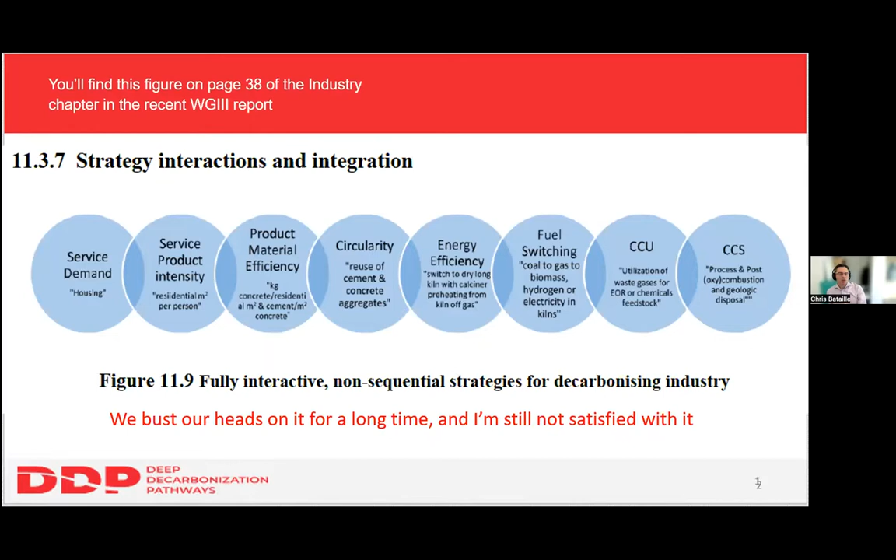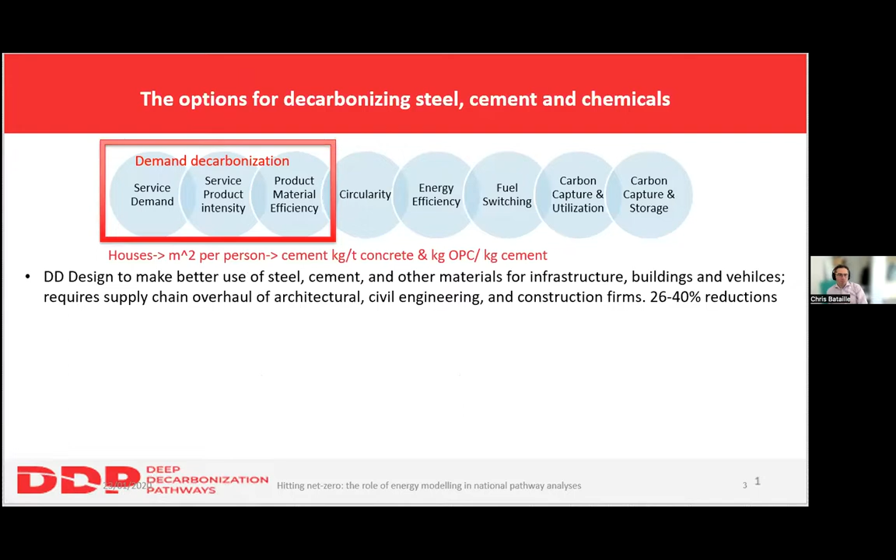Now, if we can go to the next slide, please. I'm just going to ask you to click forward about 6 times, please. Sorry, I was anticipating just until we get the big red box at the bottom. Okay, stop there, please.

Marching through, for all the industrial sectors, we march through these big interacting strategies. We looked at design to make better use of steel, cement, other materials for infrastructure, building and vehicles. However, that requires a supply chain overhaul of architectural, civil engineering, construction firms. Looks like about 26 to 40% reductions can come out of that.

In terms of circularity, we can recycle concrete by grinding up, recovering unreacted cement and aggregates. The big area for recycling is going to be steel, where we can get the maximum amount of iron product back out of the economy, but it needs less contamination - we have to do it at a higher quality level. And maybe in 100, 150 years, we won't need new primary iron. There'll be enough steel circulating in the economy that it'll only need small top-ups.

Where energy efficiency really kicks in this system is in the production decarbonization, and I would argue in a different way than we've been thinking about it up until this assessment.

For steel, up until 5 years ago, we thought it was all going to be about efficiency and CCS. But it turns out there are new primary processes that have been largely developed but just not used because they're more expensive: completely eliminating emissions in steel using direct electrification and hydrogen made either through electricity or from methane and CCS. Those processes are just coming off, they're at the near-commercial stage. They need decades of evolution to reach their nth level of energy efficiency. We're leaving the zone where we've been perfecting the blast furnace and basic oxygen furnace for almost 100 years, and making a jump to a whole new set of processes that need a whole new evolution of energy efficiency.

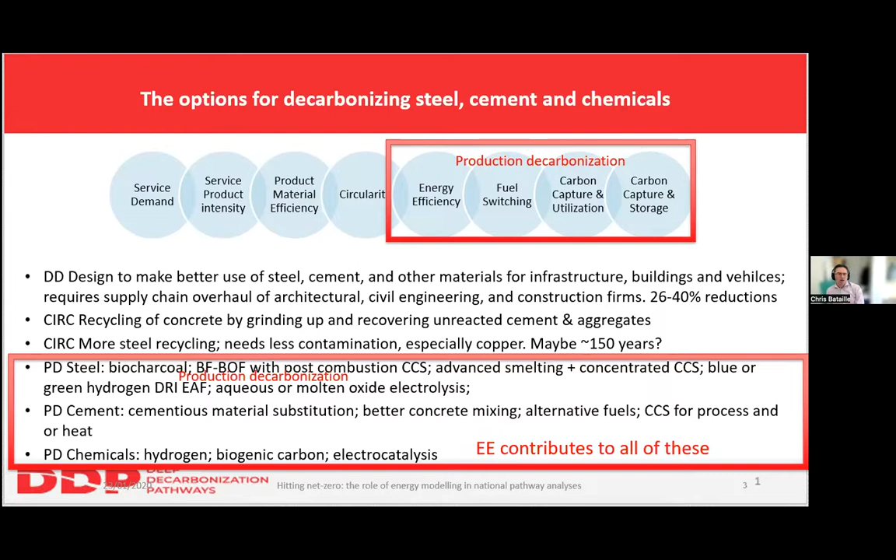Because we're moving to a whole new set of processes to produce the large materials we need, there are likely going to be structural energy efficiency possibilities from restructuring supply chains. For example, we currently make primary iron and steel near coal and iron ore and move it where it's needed. If we're using hydrogen direct reduced iron, we can make it near iron ore, using cheap, clean electricity—green hydrogen—or cheap methane and CCS, which is blue, and then move the green iron to the electric arc furnaces where it's needed.

Electric arc furnaces, on the other end, can stay where they are, near markets and supply chains, and there's a lot of room for improvement in electric arc furnaces going forward, especially in changing the anodes so they don't emit CO2 as they're operated.

Existing blast furnaces can be preloaded with up to 30% green iron, co-fired with hydrogen until the end of their kiln lives. This is a midterm strategy that is only beginning to be exploited.

Eventually, primary steel could all be run through DRI and electric arc furnaces globally, with iron being reduced and traded globally—a whole new set of trading and supply chains to make clean steel. The big efficiency jump will come eventually when there's lots of clean electricity, power capacity, and recyclable steel.

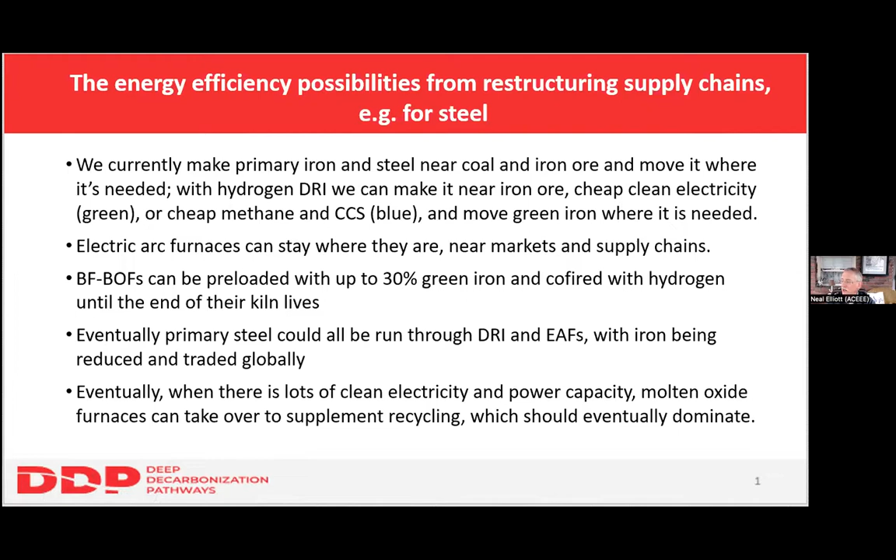I'm going to next turn to our guest representing Japan. Japan has been one of the leaders in industrial energy efficiency and industrial policy for as long as I know. I've gone back and we've used them as a model for many decades.

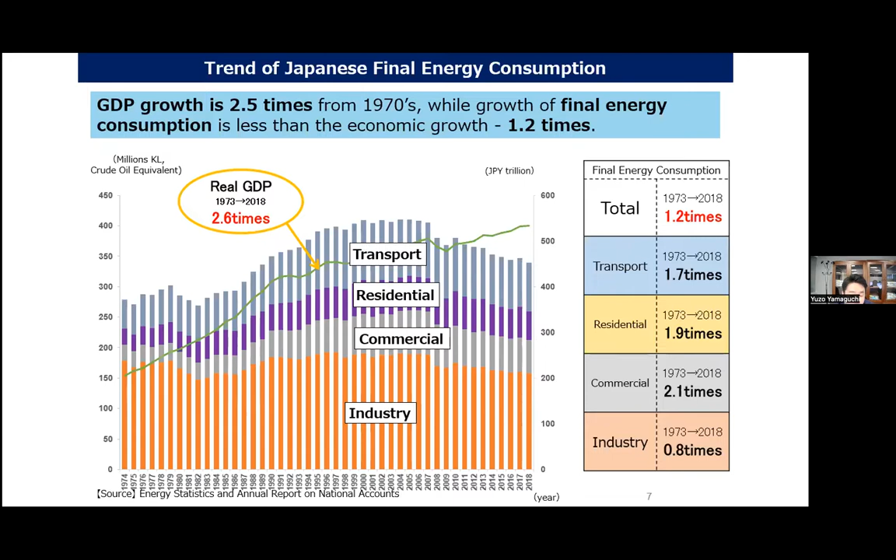Japan has engaged in the improvement of our energy efficiency. As this trend chart shows, Japan's GDP has grown 2.5 times from 1973 to 2018, but the final energy consumption has increased by only 1.2 times. This is realized by energy efficiency improvement, especially in the industry sector.

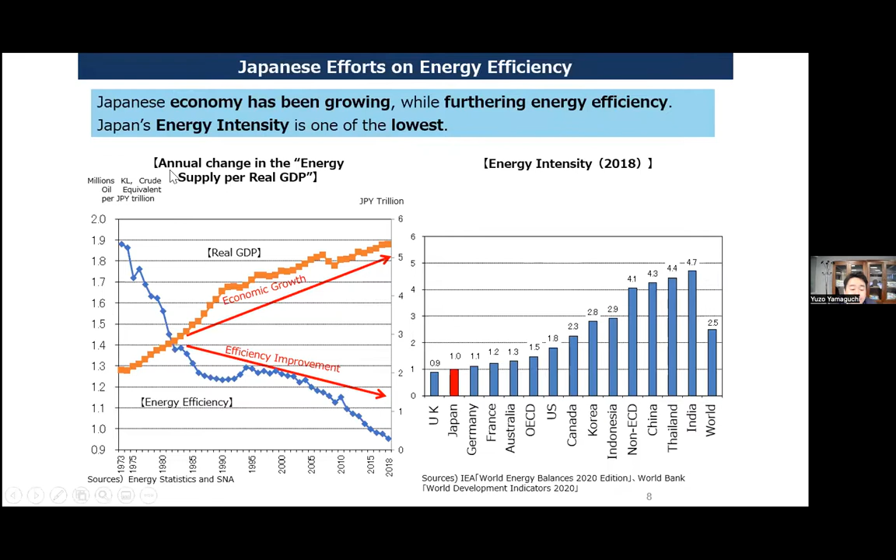After the oil shock in the 1970s, energy efficiency has constantly improved, and Japan's energy intensity is the lowest level all over the world.

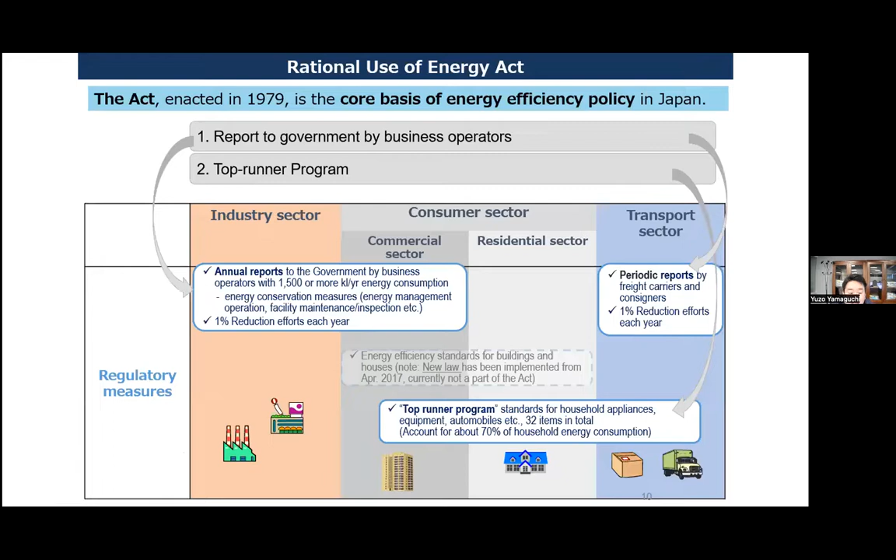What policy measure realized these energy efficiency improvements? Based on the rational use of energy act, we have had two main measures. One is a business operators' report to government, and the top runner program, covering industry sector, consumer sector, and transportation sector.

The first, what does the business operators' report to government on energy efficiency activities entail? Business operators submit periodic reports, like a 1% reduction effort each year, which METI evaluates. If the efforts are insufficient, METI directs them to submit a streamlining plan, and if necessary, METI publishes the order. This is a strong measure to push Japanese companies who feel pressured by the possibility of publication.

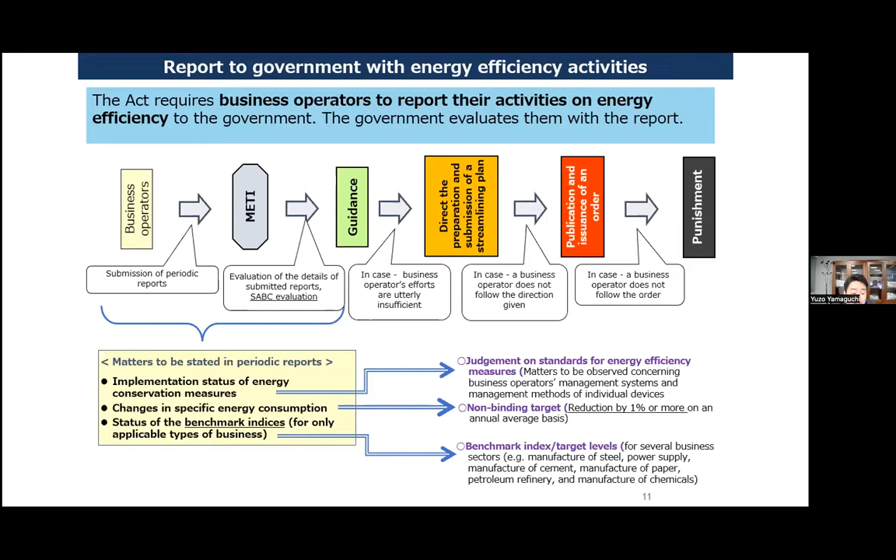Second, the top runner program encourages competition among companies by setting higher efficiency targets to be achieved in 3 to 10 years. We can set higher and more practical targets based on the performance of the top runner. Japan has achieved a 49% energy efficiency improvement in gasoline passenger vehicles, and a 43% energy efficiency improvement in electric refrigerators.

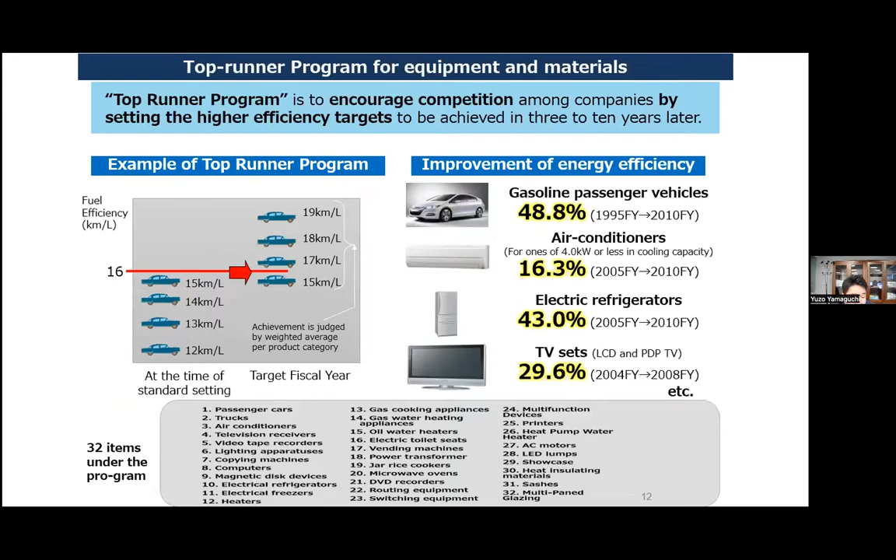As you may know, Japan announced carbon neutrality by 2050. The target was bound by law passed in Congress. It is a very rigid target and very difficult to change. Also, as a midterm target, Japan announced a 46% greenhouse gas emission reduction by 2030, with continued efforts toward 50% reduction.

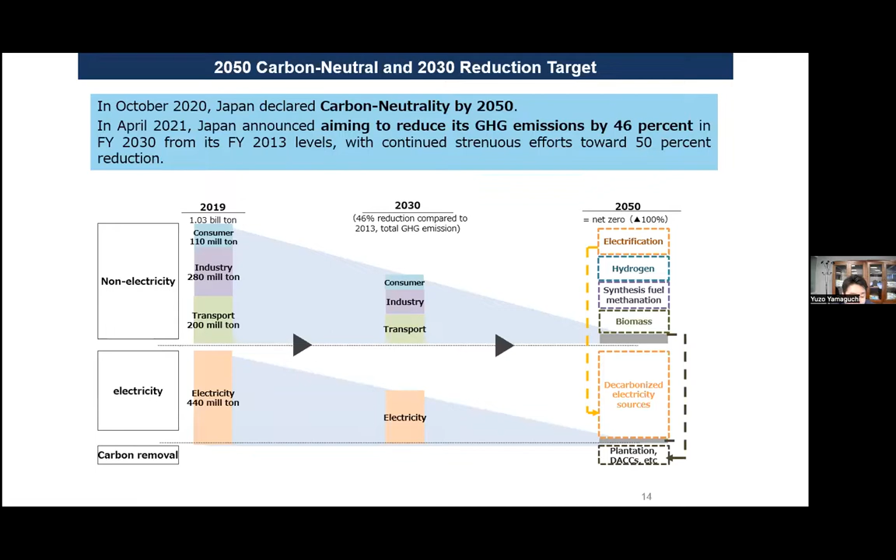Based on this ambitious climate target, we set a new energy strategic plan. What is the role of energy efficiency in this plan? The final energy consumption figure shows that energy saving is a critical factor. We aim to achieve 62 million kiloliters of energy saving. This means a further 40% efficiency improvement from 2013 to 2030, in addition to the significant reduction since the 1970s. This ambitious energy saving improvement is faster than the improvement after the oil shock.

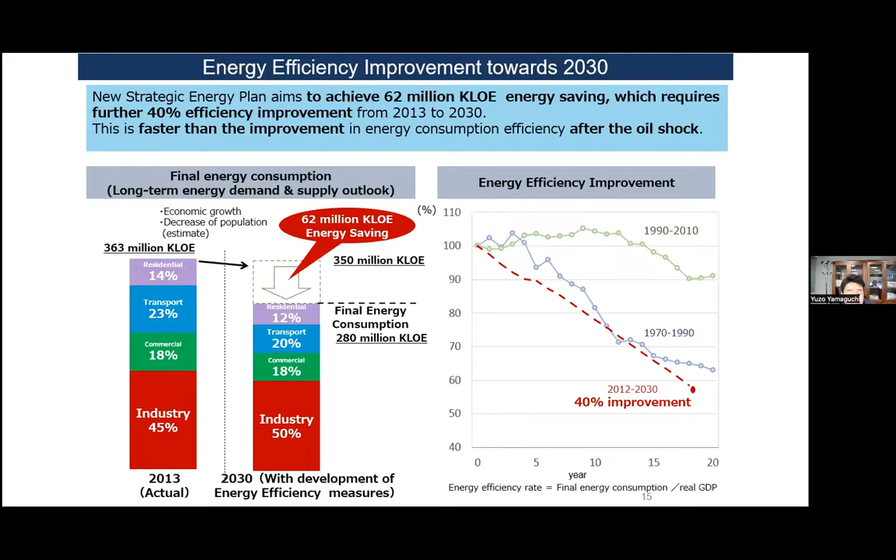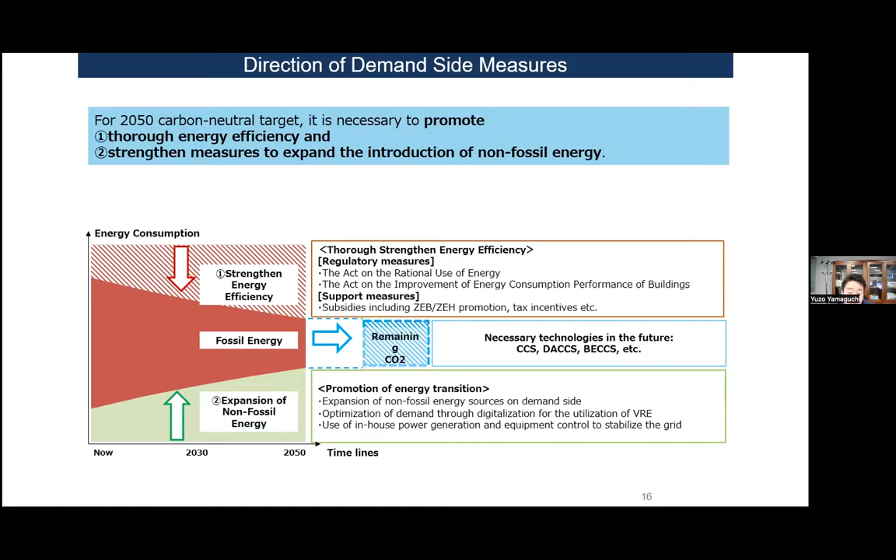In order to attain the 2050 carbon neutral target, on the demand side, it is necessary to promote both improvement of energy efficiency as well as strengthening measures to introduce non-fossil energy.

The number 62 million kiloliters is accumulated from estimated energy consumption in the industry sector, business sector, residential sector, and transportation sector. Promotion of energy-saving buildings and houses, diffusion of next-generation automobiles, and measures in freight transport account for the expected big reduction. In addition to current energy conservation measures, we will both strengthen the rational use of energy act as well as support the development of advanced energy-saving technologies.

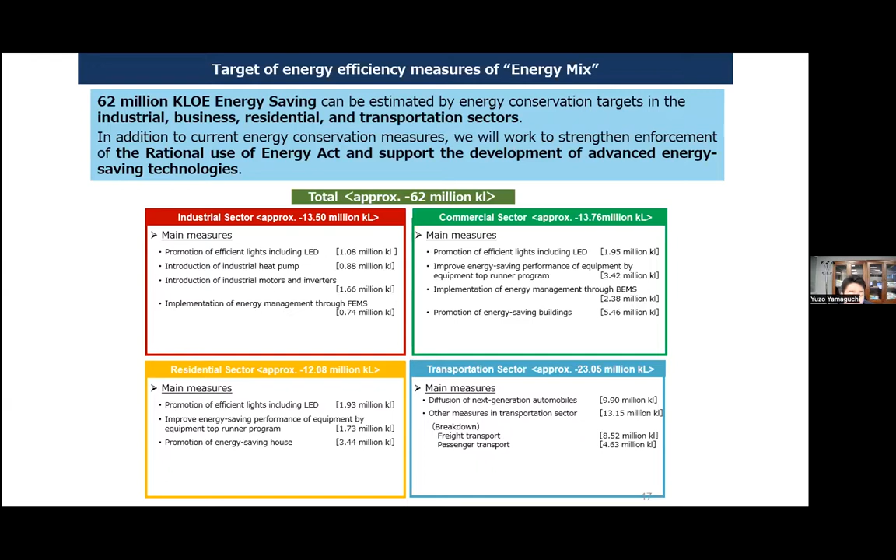Last month, the Japanese government submitted a bill to promote further energy conservation and non-fossilization. We will make use of all types of energy, including non-fossil energy, and establish a system requiring business operators to develop midterm and long-term plans for conversion to non-fossil energy, and then report them to the government.

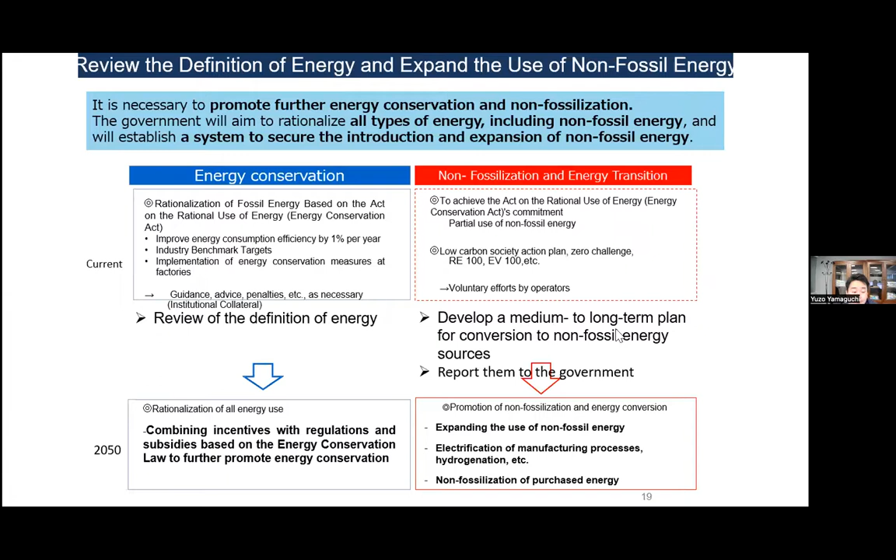Lastly, I would like to introduce R&D efforts for energy saving in Japan. NEDO, the government funding agency, supports R&D and technology development for utilization of unused thermal energy, such as reduce, reuse, and recyclable heat. The budget for these projects is $17 million.

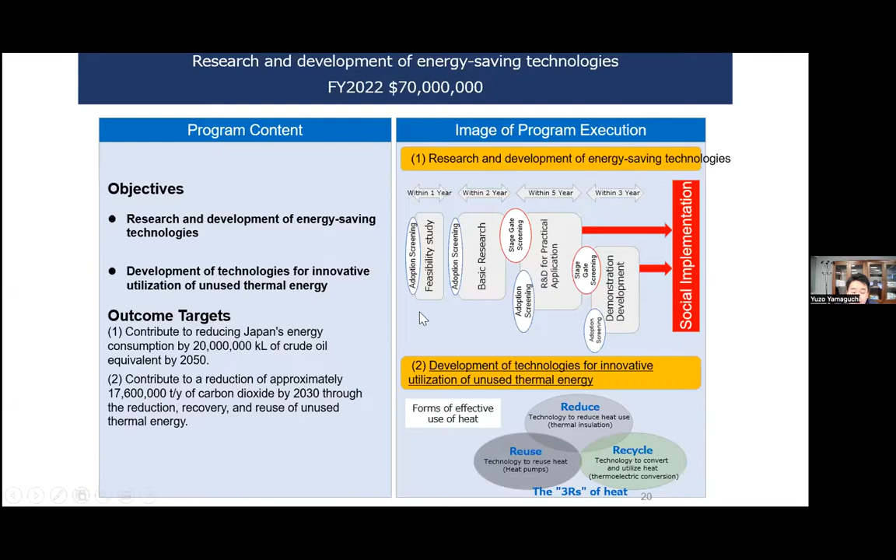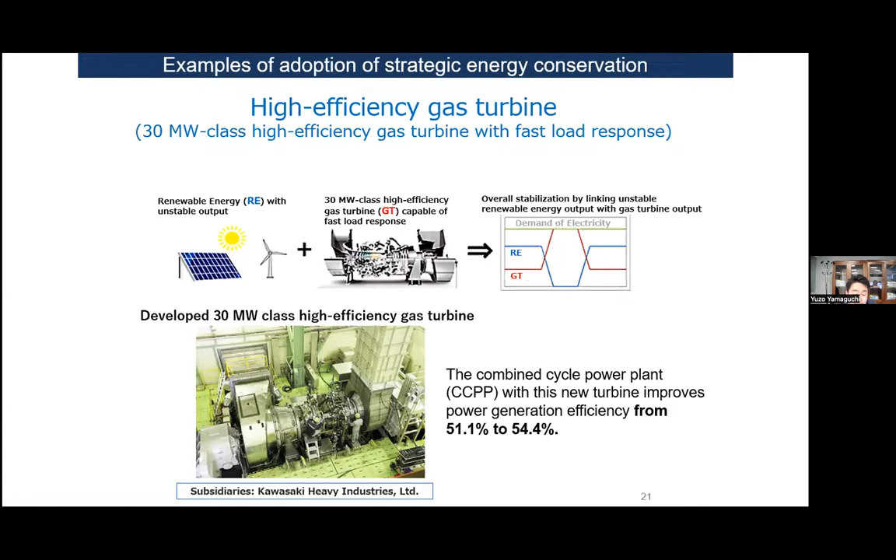One example is a high efficiency gas turbine. Unstable renewable energy output will be supported by gas turbine output. Under our program, the combined cycle power plant improves power generation efficiency from 51.1% to 54.4%.

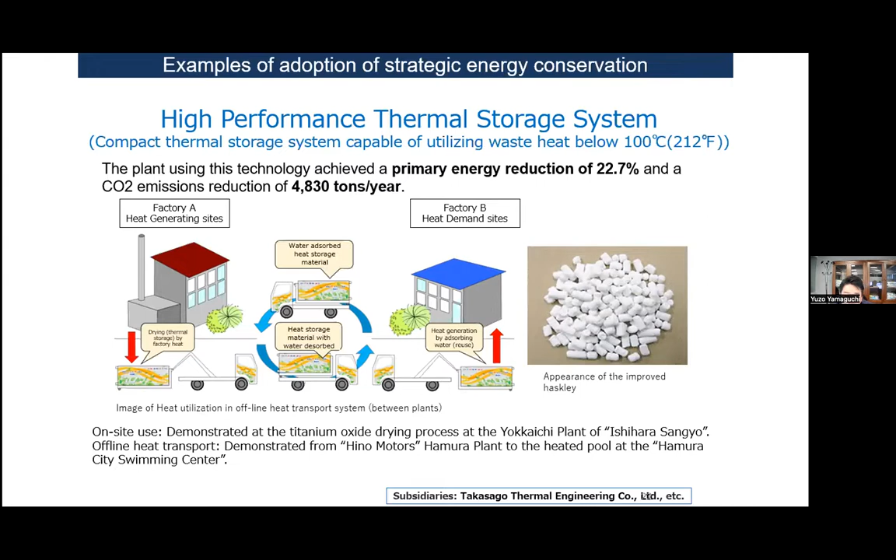The second example is a high performance thermal storage system. We are developing a compact thermal storage system that can utilize waste heat below 100 degrees Celsius. The utilization of waste heat can reduce energy by 22.7% and reduce CO2 emission by 4,830 tons per year.

The third example is a carbon fiber reinforced plastic, or CFRP, recycling system. We are developing a technology that regenerates the carbon fiber from CFRP, resulting in energy saving. For example, we can achieve a 50% reduction in kerosene consumption in carbonization furnaces.

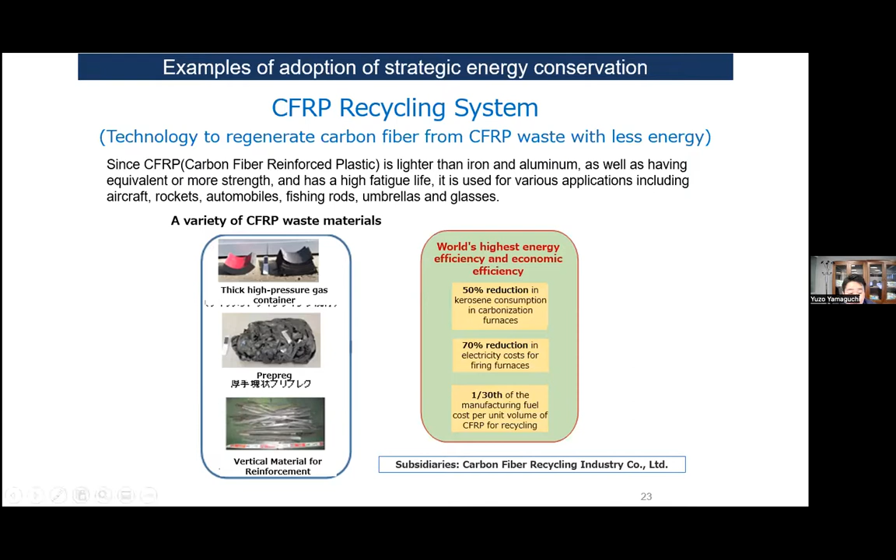The fourth example is high efficiency power converters. A high efficiency power converter system using SiC devices can reduce power consumption by about 33%. These are some examples around the program for energy saving in Japan.

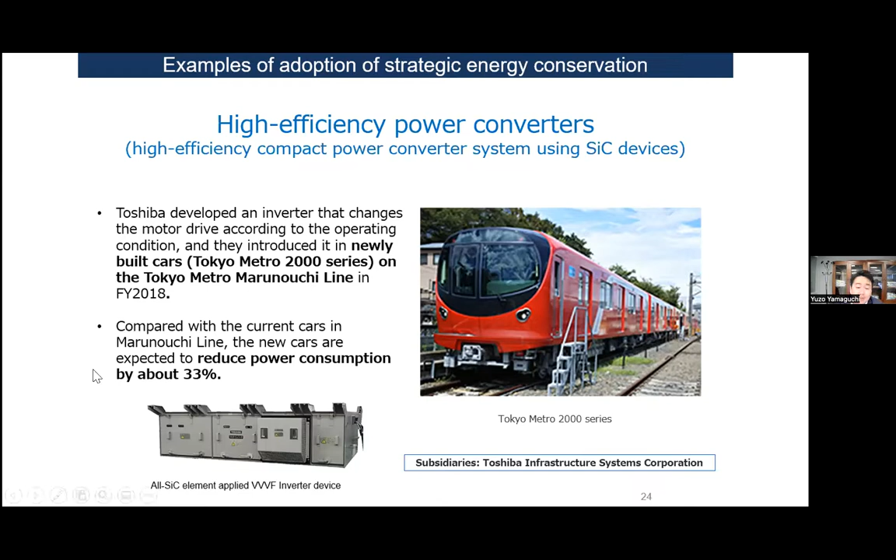We will achieve these ambitious energy saving targets through both strengthening our regulation as well as developing energy conservation technologies. That's all for my presentation. Thank you for your kind attention.

So we'll just go to the next slide, and I'll go through these slides fairly quickly. A2EP is what we're more commonly known as in Australia. We're a not-for-profit organisation funded largely by members, and we've been around for about 10 years, really pushing energy productivity.

Just to talk a minute about energy productivity - we find that when we talk about more dollars and more value from less gigajoules, that connects much more with businesses and manufacturers here in Australia. So we focus much more on production and yield and the value of the goods that are produced, and when framing it like that, we're much more likely to get business cases over the line.

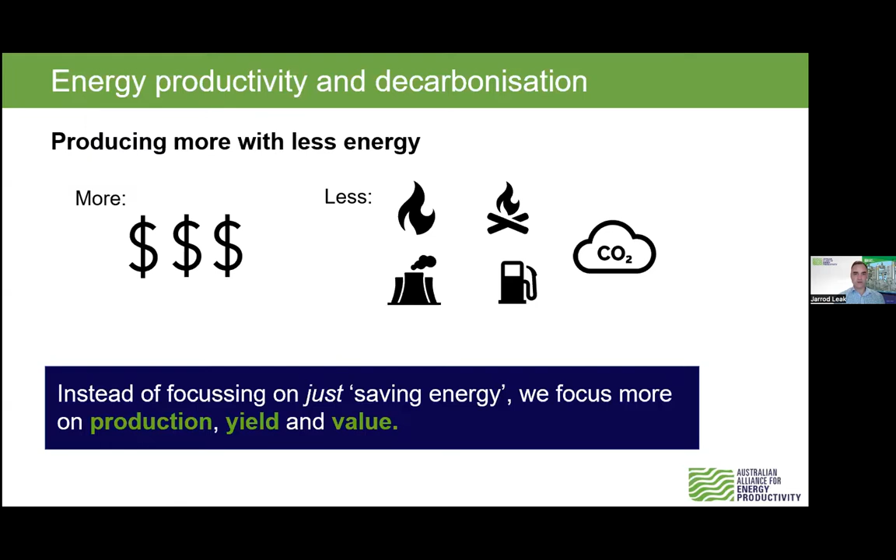So if we go to the next slide, let's talk about industrial heat pumps now. You may say they've been around for many years - their concept is not new, and a lot of people have them in their own homes as an air conditioner, so they're really quite well known.

But what's new about using them in the industrial sense? What's new is these decarbonisation commitments, certainly being led by the likes in Europe and multinationals there, and with that, things like carbon border adjustment mechanisms are having an impact as a driver. The second major driver, a little unique to Australia for the moment, is we've had a very big rollout of solar PV and wind coming in behind that, and that has changed the ratio for that spark-to-gas ratio, making electricity much cheaper.

And so that's heading down to $15 - let's call that $12 Australian per megawatt hour by 2050. The third major change helping drive industrial heat pumps is connectivity and cheaper connectivity, allowing end users to be able to better map their heat flows and heat demands, and therefore optimize the installation of a heat pump.

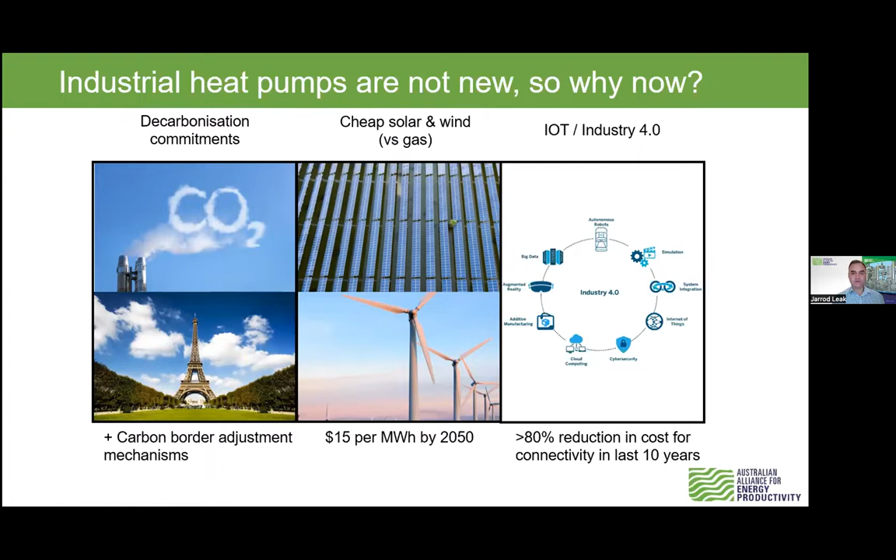So if we go to the next slide, what's so fancy, what's so good about them? It's those three letters: coefficient of performance. If we compare that to a traditional steam boiler, which is used very much largely across industry, especially in food and beverage manufacturing, most people may think that their boiler, looking at that alone, is around 80 to 87% efficient if they're very efficient.

However, if you look at an entire steam system and consider all the losses along the way, that can be as low as 30% efficient. I think I've been kind in my calculations to say it's usually about 70% efficient, but most is below that when you look at the entire steam system.

So if you take the typical industrial heat pump producing hot water at say 75, 80 degrees - sorry, I haven't got the Fahrenheit at the top of my mind - you'd look at a coefficient of performance of at least 3, and they can certainly perform up to 6 or 7, no problems there. Even at a coefficient of performance of 3, you're looking at some 400% improvement, and that's what overcomes that electricity to gas price ratio. That's the first thing that does it. It's not the only thing, and we'll get to that in a moment.

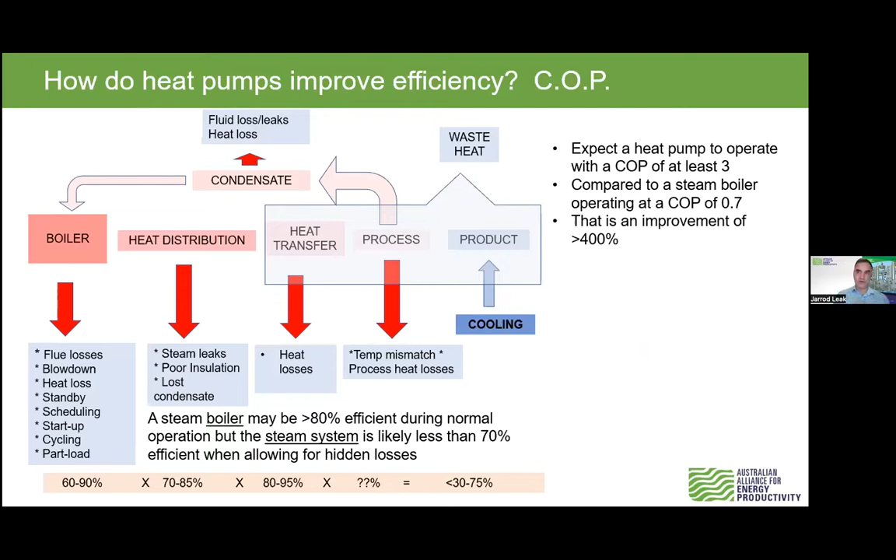If we go to the next slide, very quickly, just for later reference, the type of heat pumps we've been looking at is the mechanical vapor compression, or standard compression heat pumps using a refrigerant in a closed cycle. The other is mechanical vapor recompression, which is an open cycle, and that's very commonly used in evaporation plants and very applicable for distillation columns as well.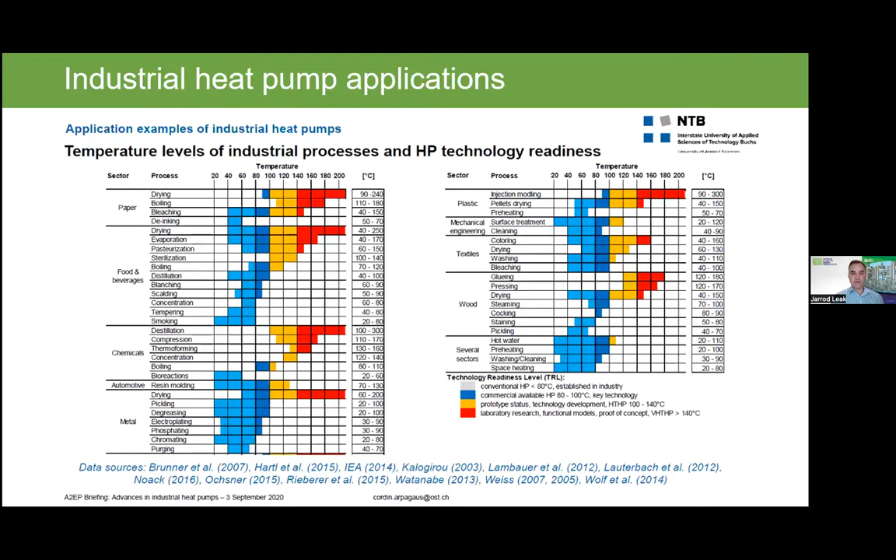So if we go to the next slide, let's have a look at this from an Australian perspective - what is possible in terms of decarbonisation. The chart on the right is a breakdown of energy consumption in Australia, and you see 42% is from industry. Of that 42%, 51% or so is for process heating. Of that, a big chunk is above 800 degrees, for things like alumina calcining and metals and what have you.

And so that is definitely out of range for heat pumps, and Australia is pursuing a hydrogen future mainly for that very high temperature requirement. But in this chart, really anything below 250 degrees, making up nearly 50% of that process heating demand, is certainly possible to do with industrial heat pumps.

If you look at Australia's overall emissions - a very high emitter, but quite an energy intensive manufacturing country - approximately 20% of Australia's emissions comes from stationary combustion, which is for boilers, burners, and gas turbines running compressors. Of that, around 10 to 15% can be electrified using MVR and heat pump technology, so in terms of a total, maybe that's 3 or 4% of total emissions. But if you look at what's considered hard to abate emissions from that stationary combustion, it's quite a big chunk.

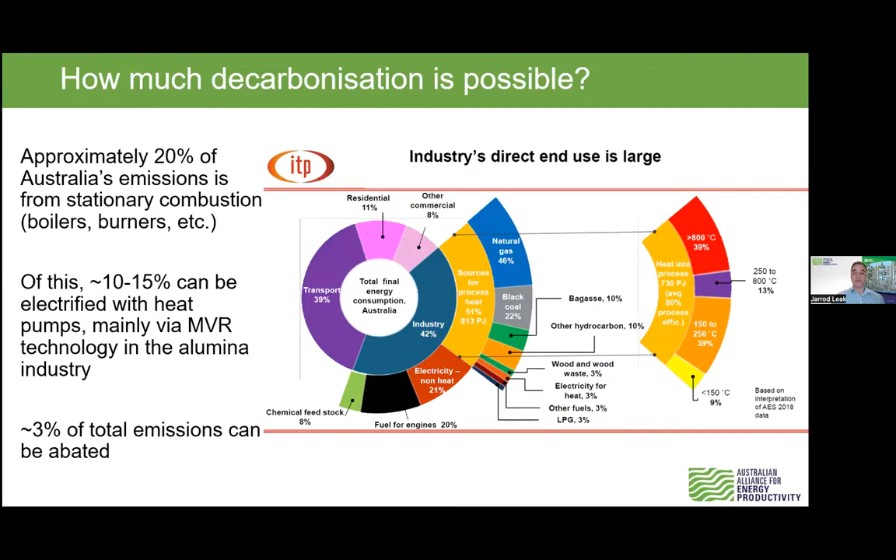So if we go to the next slide, just some lessons on how this is being supported in Australia. Ideally, I guess you'd just have a very simple carbon tax or emissions trading scheme, but that's very unpalatable, as you would know in the US, for countries which produce a lot of fossil fuels at the moment. Very hard to get through in a democracy.

So then once you start looking at other incentives to make change happen, these are a few things that have worked well in Australia. In terms of making the ROI better, certain states have implemented energy savings or carbon saving schemes where there's a payment per tonne of carbon, currently sitting in one particular state at around $50 per tonne. We think that's at least at a good level - somewhere between $50 to $70 a tonne seems to have quite a big impact.

Apart from that, there's been some good government programs helping with creating awareness and learning opportunities, and also studies that help remove barriers, and then helping first movers adopt the technology. So in each individual industry or sector, government has been awarding grants to help those sectors and first movers adopt the technology, and that's had a reasonable impact. Finally, there's been a fair bit of effort as well in terms of knowledge sharing and sharing lessons learned.

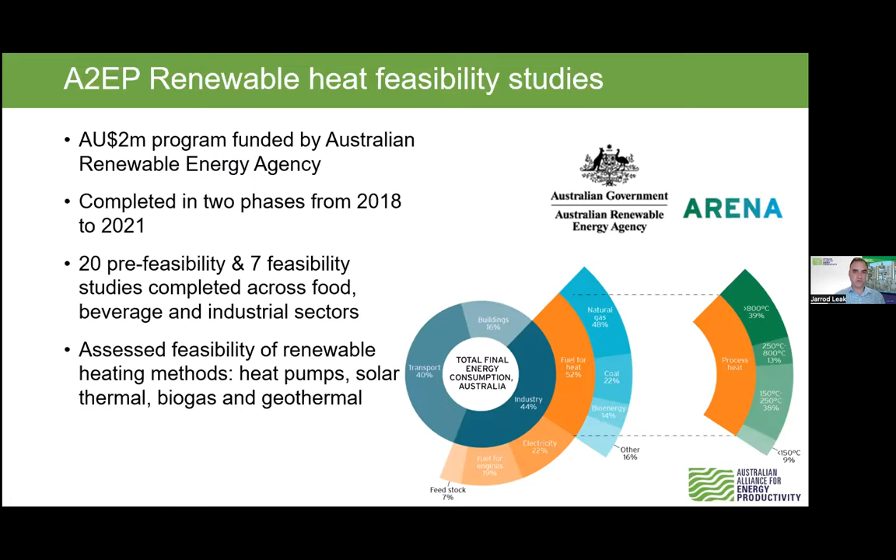This was used to assess the feasibility of different methods. Heat pumps was actually just one of those methods looked at in the pre-feasibility. We also looked at solar thermal, biogas and geothermal, but certainly below 100 degrees, we saw the best potential there coming out of the studies in heat pumps.

On the next slide, I'll give you a bit of a summary of the key lessons learned. As mentioned before, the electricity to gas price ratio is largely overcome by the coefficient of performance, but that's not enough. From the studies and the work we've done, the most important factor really is the capacity factor. As a heat pump has a cost which is some 8 to 10 times that of a traditional steam boiler on a per kilowatt basis, you really need to get the most out of that asset. So the best measurement there is that capacity factor - how often is that piece of equipment running at full capacity? You'll see from our studies a very close correlation to return on investment when you look at payback for those that had a high capacity factor.

In this case, we had some with a higher than 100% capacity factor because heat recovery was implemented at the same time. So effectively, the overall project ended up with a capacity factor above 100%, but yes, that's because of the heat recovery done at the same time.

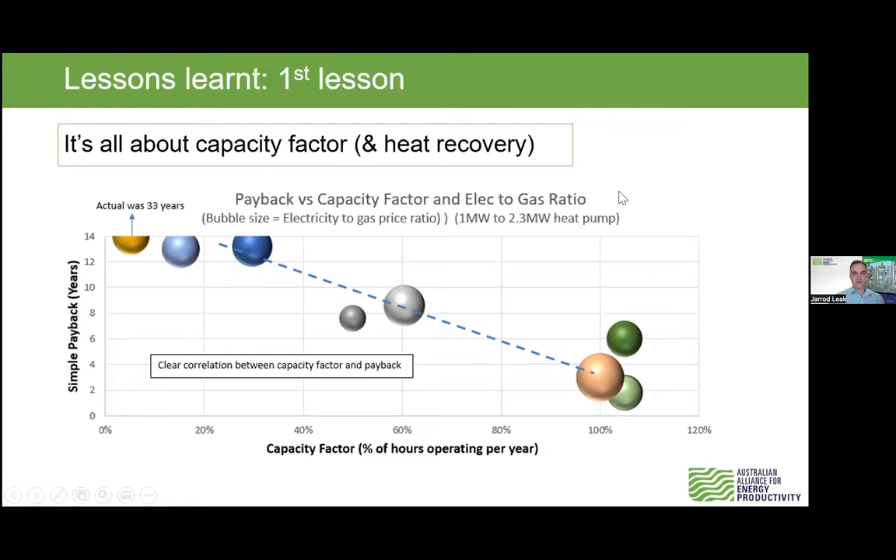If you go to the next slide, the second major lesson learned, which very much helps with the coefficient of performance achieved, is taking an integrated approach. Not just a like-for-like replacement, not just taking a 2 megawatt boiler and replacing it with a 2 megawatt heat pump - it's very much about getting that right. This is a process that can be used by collecting information, identifying the opportunities and doing some modeling, which can optimize that integrative design. This includes things like using pinch analysis or an energy and mass balance as well.

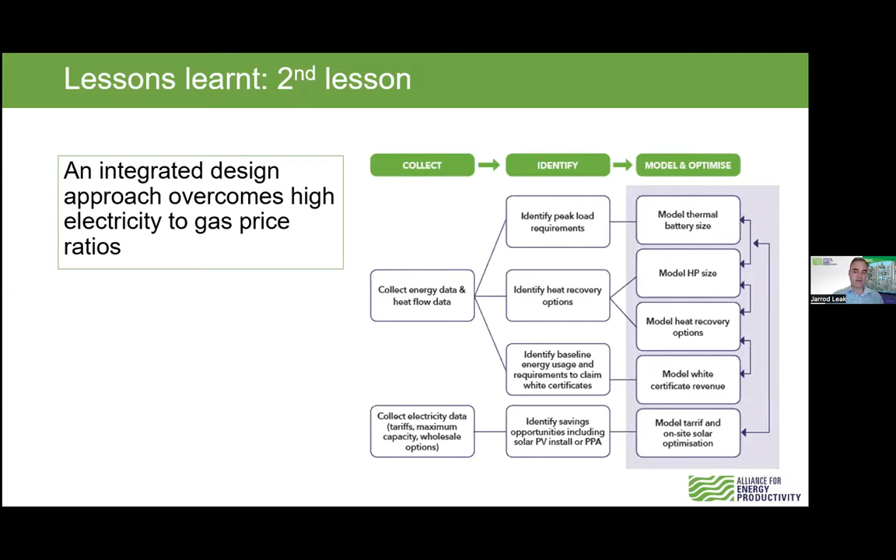On the next slide, the conclusion for lessons learned is it's very much about right sizing that heat pump. Don't look for that straight change in, change out. You should expect that the thermal capacity of the industrial heat pump is some 50% of the original steam boiler it's replacing, by the time you account for the improvement and reduction of heat loss to the surrounds, and you size in a thermal battery to remove those peak loads that the steam boiler was sized for. You should be aiming to be at most 50%, and we've seen some cases down at 40% of what was originally there with a steam boiler of that nameplate capacity. That's when you start seeing real change in the economics, and all of a sudden the standalone economics makes it viable to go forward.

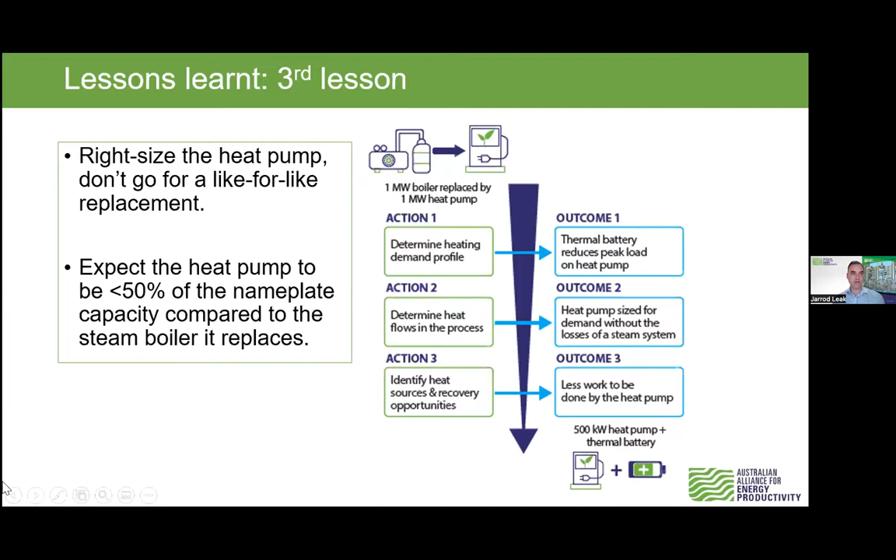I'll finish off with a couple of slides about some other activities we did. We did a fair bit of knowledge sharing over lots of different webinars, and these are actually available on YouTube. If you Google A2EP on YouTube or search for that, you'll see a lot of different webinars that we've done, lots of lessons learned, lots of posts, lots of different things to get the message out there. There's also a publication and lots of podcasts.

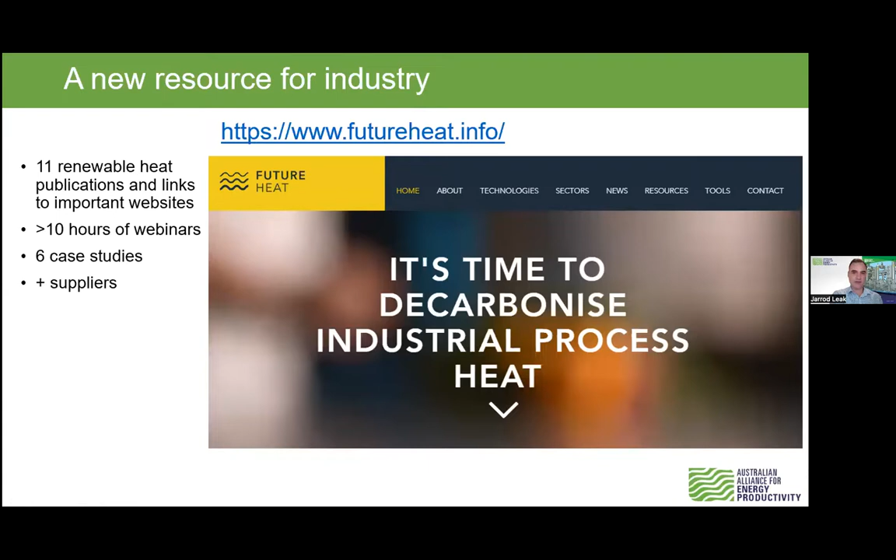On the next slide, you'll see we also developed a website. If you go to futureheat.info, it's one site where we've taken lots of different resources from around the world and lots of lessons learned, and certainly our latest publication is on there as well. On the next slide, you'll see this is the tool.

We also developed a quick sizing tool so that you can do a little bit of modeling, looking at different temperature demands and seeing how that impacts the coefficient of performance and the costs. That would certainly help designers and developers look at this technology.